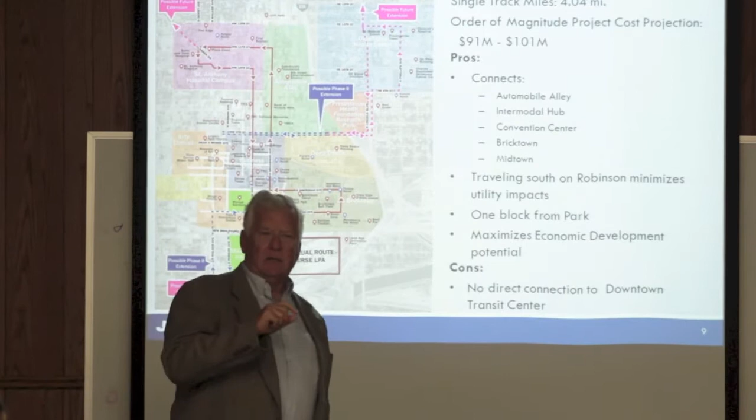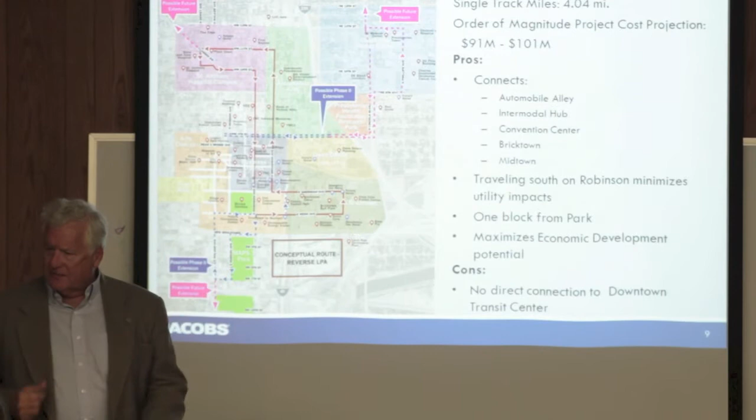We have brought forward to you 4 options that we would judge are professionally viable and the best ones to meet the criteria. And as we said, the purpose of today is to get all the questions on the table, comments, issues, and other things, sift through that, and then after this meeting come to agreement in the subsequent months as to the alignment that you intend to select.

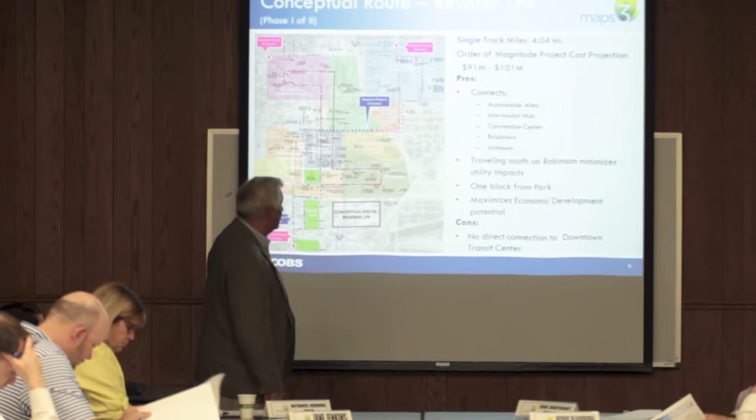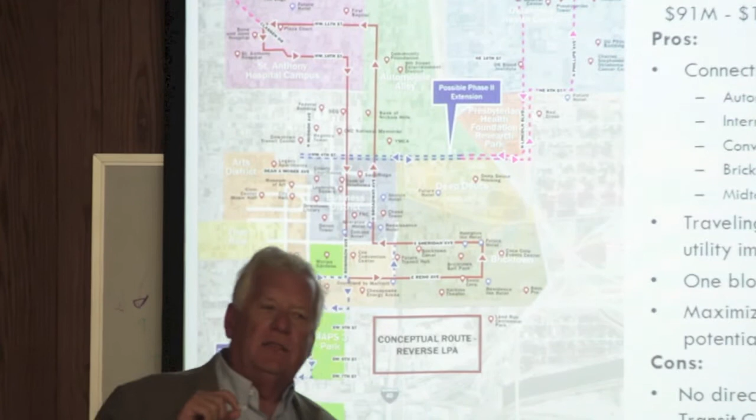The red line is the phase 1 line. And this one, we've labeled it - we call it reverse LPA, and I'll explain that to you. The blue dashed lines - there are 2 different blue dashed lines - those are candidates for a phase 2 expansion, and each one of them is approximately equal to the amount of money that's in the phase 2 budget, $24 million.

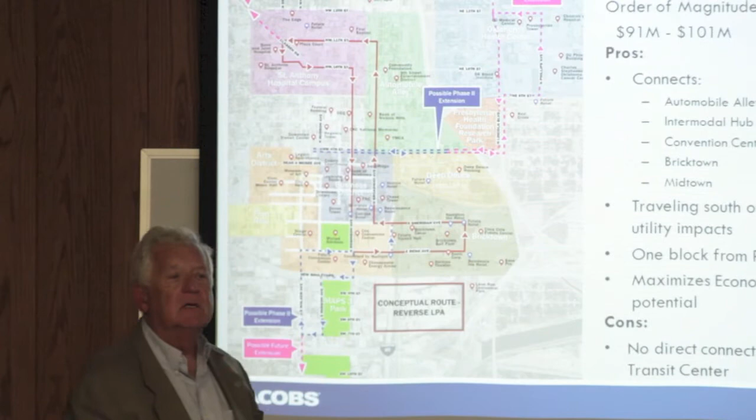It does show that you can build a phase 2 line in segments, build a key segment to begin with, and the red or almost pink dashed lines are further extensions that could be made. It's more to test whether in building the first one you've put it in the right place to where it could serve further interests, if you decide as a community that that's what you want to do in expanding it.

So we had, for instance, the core to shore line, and then this extension down connecting on Walker to the further south to the river in Capitol Hill, the OHC line, and then even a possible future extension on Placid. So all of those fit with what's been prepared for you to evaluate.

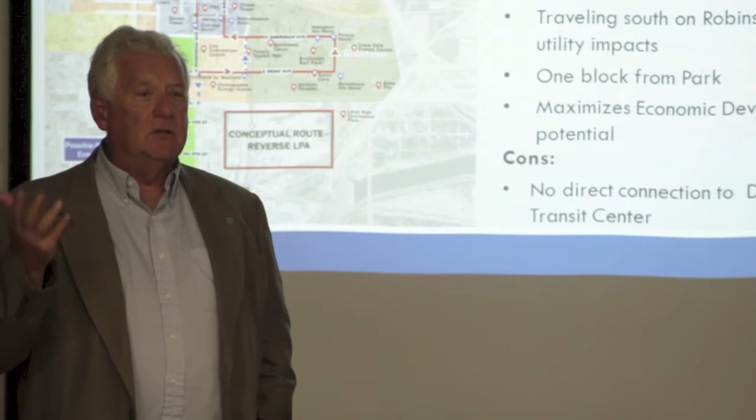So the first option, the phase 1 option featured here, is called the reverse LPA, which is essentially to reverse the direction from how you had the LPA operating. The primary mover behind that were the duct banks in Robinson and the utility impacts. Now that's a trade-off. That gave, in our judgment, a nod to the reverse LPA over the regular LPA.

So the LPA was a well-done piece of work, matching the fundamental component of Midtown to Bricktown. It's quite legible, very straightforward, but we reversed the direction. And it has issues both in terms of how that couplet works, and issues in terms of the stop down near the hub. The major negative we found in looking at reaching all the destinations was that the existing transit hub is not served with this option.

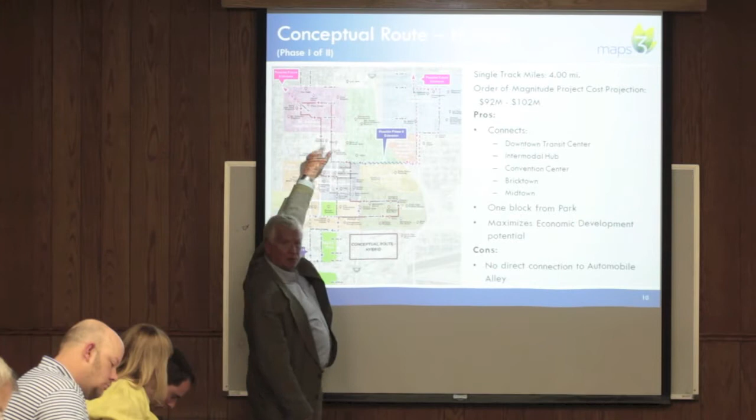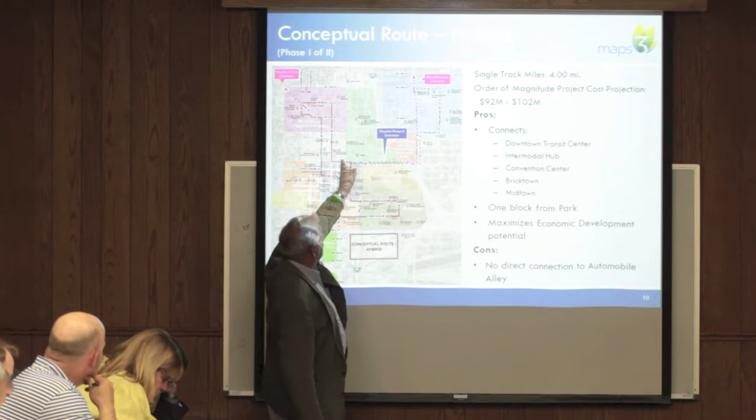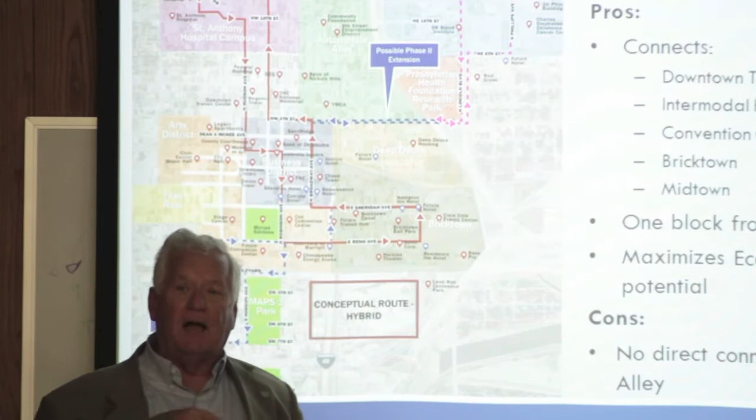We did a two-way Hudson option, and we looked at that one, and then by turning it at 4th Street, here you tie in with a long-term plan, and then come down the regular route the same as the reverse LPA. So there's a very obvious missing piece of this one, which is it doesn't serve Automobile Alley, a very significant aspect of it.

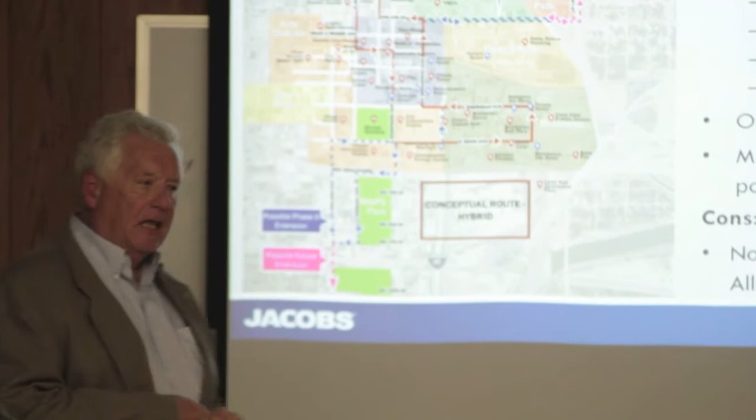What we're sharing with you is the same thing you've shared for quite a long time in your work: it's very hard to establish an alignment that takes care of all of the destinations that you have in mind. So that's the hybrid, and it's, again, viable, legible, straightforward, making the Midtown to Bricktown connection. It matches all of the possible expansions that you could make in the system. So it was also rated as reasonable and viable.

Next one, the Zeta option. We worked at coming up with a name for it. It's Z, but Zeta sounds like a good option, and that's the name we provided to it.

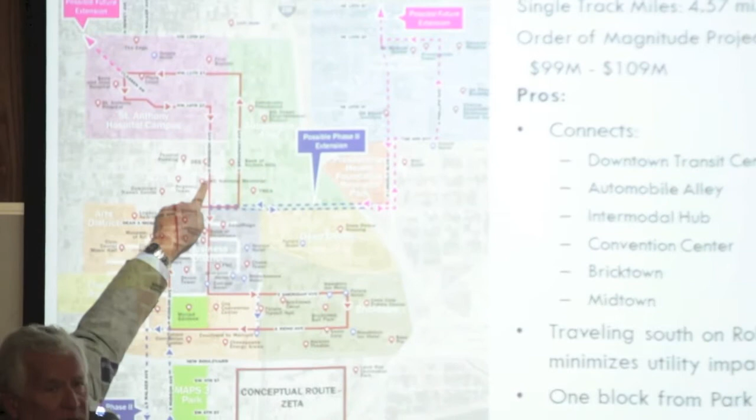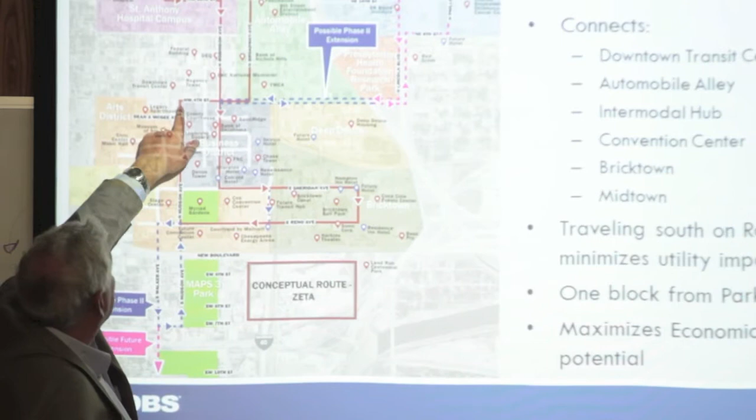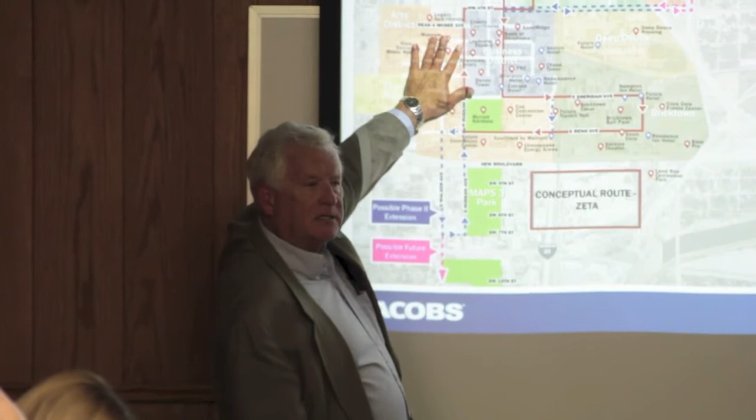On the north side, it serves the Broadway corridor and Robinson, and then turns at 4th Street. It comes down, straight down as the reverse LPA on Robinson, into Bricktown, around Bricktown, and then up Hudson to 4th Street, and then back to Broadway. It takes in the transit center, provides your Bricktown connection, your Midtown connection, and makes a stronger gesture toward the municipal side of the downtown business center, the arts district, and close to Film Row.

So that Zeta option has been judged as feasible, and as you can see, it also fits into the system expansion plans.

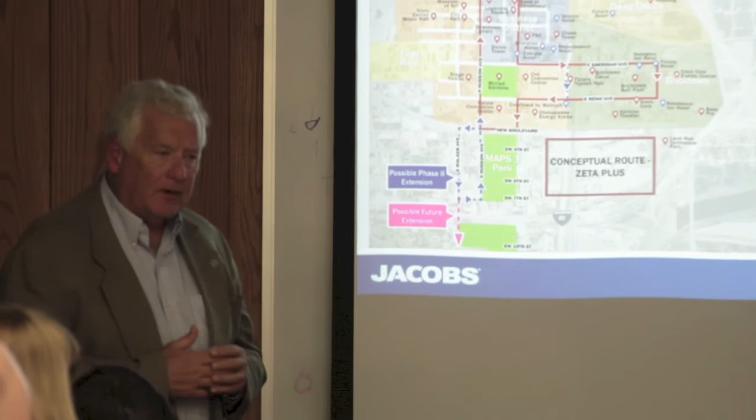The final option we call Zeta Plus, because the drawback of the Zeta was recognizing that there was not direct access to the park and service on the boulevard. Certainly the direct access for a streetcar to the park is judged as very important. There's definitely interest in seeing Phase 2 address that.

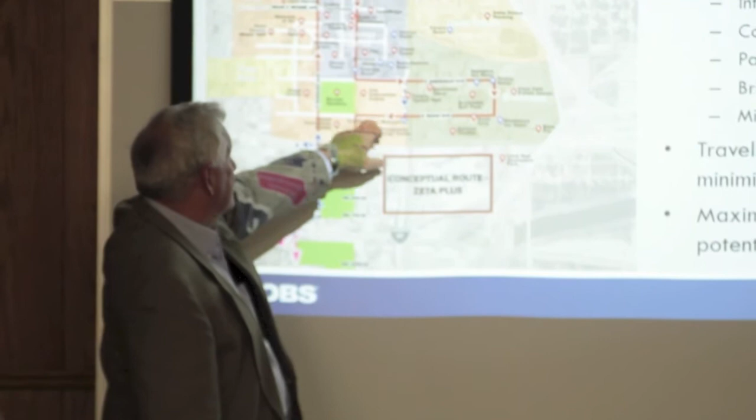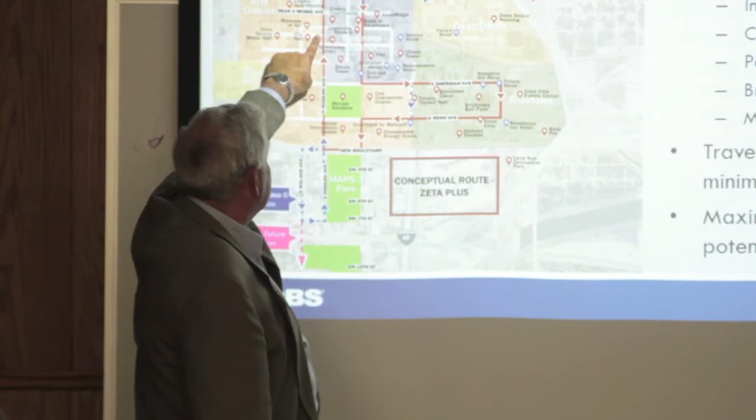This one proposes coming on Reno, turning down to the boulevard and then back up Hudson, down on Robinson, making this jog around in this direction and then heading north. That's the primary difference between the Zeta option and the Zeta Plus option.

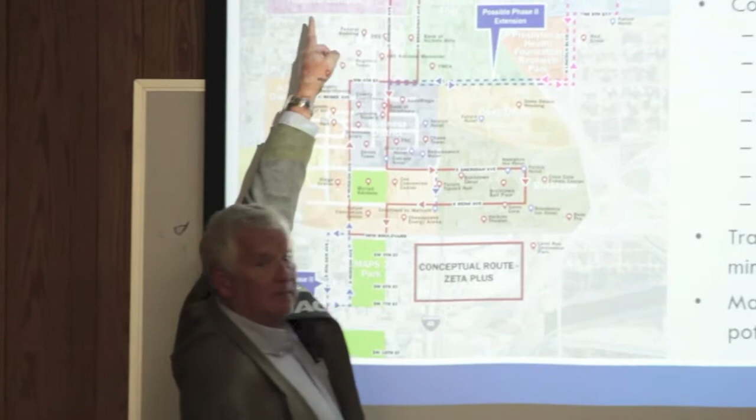We will discuss more thoroughly the issue about Midtown. There are a number of options available to you about how to most effectively serve Midtown and its potential, and they have cost ramifications and access ramifications, and we can show you. This is the one that we pose as the least expensive option.

Because you notice the cost estimate for the Zeta Plus option is $97 to $107 million, and the budget is $94 million. So we as a team are determined to meet the Phase 1 budget and provide you a project for Phase 1 that makes it possible to allow Phase 2 to proceed on the schedule you have. That means trying to make sure you can build the first project for the $94 million budget you have. So we will work on that, and that's a challenge to us to help you reduce the scope and the cost in order to deliver the project within that budget.

But the North Midtown, what we call the tail track, and I'll describe that in a minute when we get to that slide, is a way to save money to enable the additional track miles needed in order to cover the access to the park and service on the boulevard.

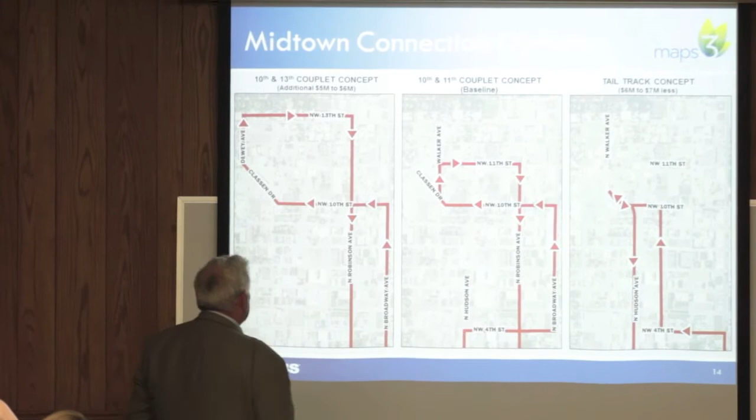So now Midtown - as we did the economic analysis and found the catalyst sites in the St. Anthony's area, and the circle became very important, we are recommending that you definitely have the streetcar on 10th Street. It has the best economic development potential. So we're recommending moving from 11th to 10th from the LPA that was adopted.

And what this does is open up questions for you as to which type of service you want to provide in the area. This would be closer to what was in the LPA, only on 11th, but continuing on 10th up to Dewey and around 13th. That's the most expensive option.

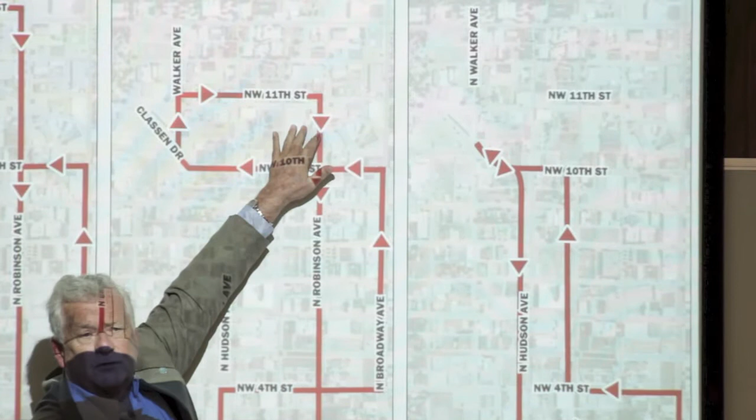This one, by going on 10th, allows you to utilize 11th, and by reversing the direction, you avoid the hook in 11th, where it's harder to have a streetcar move through - not impossible - and then come down Robinson. That's the little loop, which we use as our baseline for costs.

And then you have a choice of going to what we call a tail track, or a dead end, where the tracks merge and the train comes back the other direction. That's quite often utilized and it's really not a problem in operations because you have to have recovery time for your vehicle anyway, so a tail track works quite effectively. The biggest problem is that it needs to be out of traffic, so in this location that will take some design creativity, but we have one of the most creative designers I know - Mark has quite a bit of experience with this and actually came up with this idea.

And this option of the tail track could fit with any of the options that have been offered to you. This shows it on the hybrid, but if you simply double track 10th over to the other ones, you can hook 10th Street into any one of the options and it will work. That's the least expensive option.

So it's a whole question of judgment: have you accomplished enough to spur the development being planned in St. Anthony's with the tail track, or does some type of loop seem more important in order to encourage that development? It ought to be driven by what you believe is the best investment you can make for future development in the city.

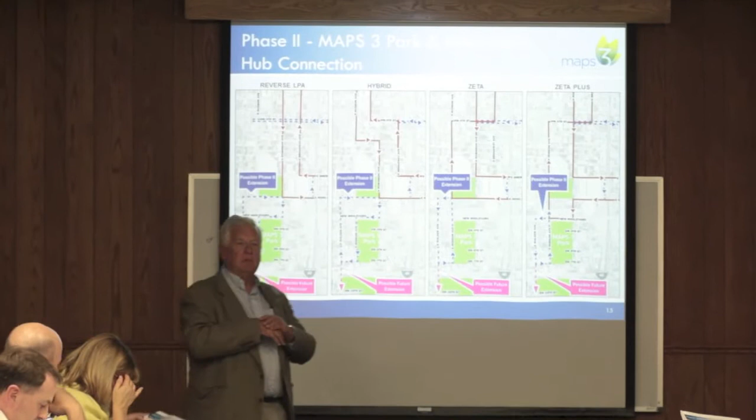The last item is to discuss the Phase 2 options and give you a little bit of the thought process we went through looking at Phase 2, making sure that once you put the tracks down in Phase 1, we haven't overlooked something about how you actually create a Phase 2 and an extension. Two options were considered, based on reaffirmation of your original plan to have the first line connect Midtown to Bricktown, and the second line for the Oklahoma Health Center to the park and Core to Shore. This is the same idea of beginning to look at Phase 2 as starting to accomplish that - these are the blue striped lines that we talked about.

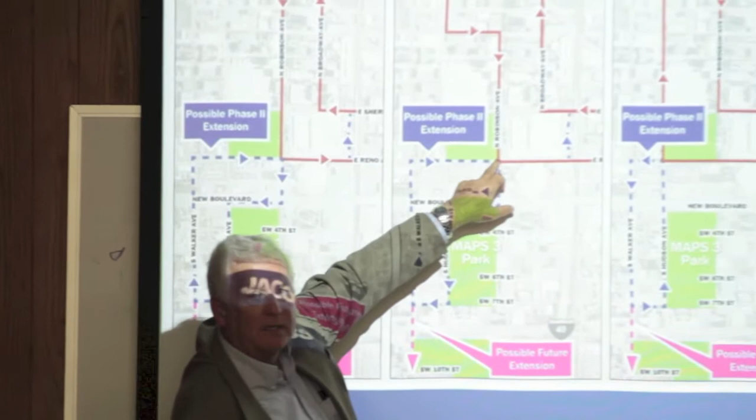So the options for Core to Shore are to connect with the existing line, the Phase 1 line here, continuing Robinson south to the boulevard, across and down in front of the park, all the way turning around back on Walker.

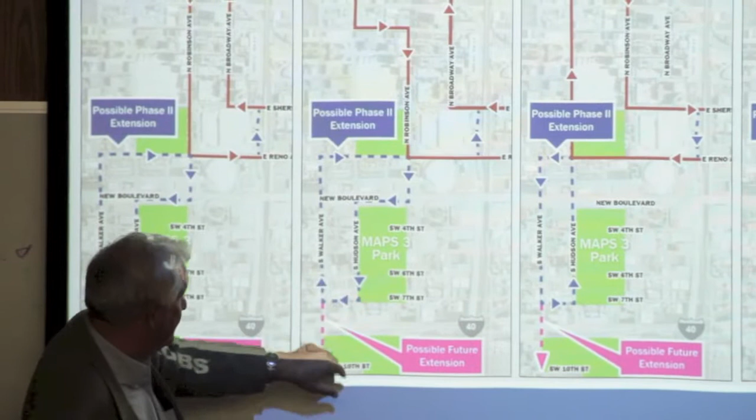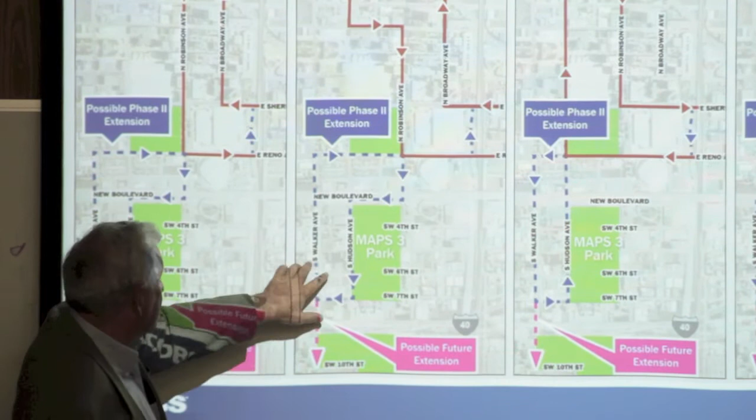The reason for being on Walker and doing this couplet is because the access south would be this direction. So this would work quite effectively with Walker being tracks in both lanes, in both directions, and a single couplet track here with Walker, and then coming back and connecting here, and then turning at Gaylord, and then continuing on up to eventually taking the 4th Street extension. So that's the core to shore.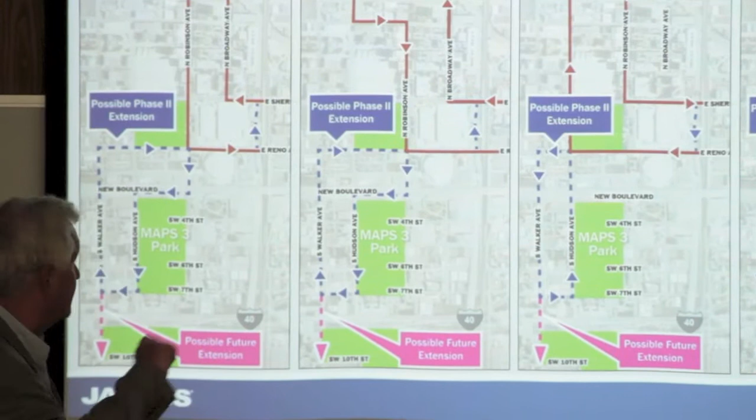They're all similar, little modification here, which can be, doesn't have to be. There's really a choice between this, but it could show you could also come all the way to Walker and then back up the park and then straight up Hudson. So this kept it straight from here all the way to the top. So those are just options that you could consider in phase 2.

The second option then is the extension of 4th Street, starting toward the Oklahoma Health Center, and that's certainly an option too. That would be tracks in both directions on 4th Street, then making the connection. The challenge with that one is there isn't enough money to get to the Oklahoma Health Center, so you could build the section through Deep Deuce with the 24 million.

Let me ask you, on the phase 2 expansion, are the blue lines either or? Either or. Okay.

Well, what we've drawn is one segment. This segment here, combined with this, ends up being an operable segment for you, and would cost probably $24 million. This would also be an operable segment for you and would cost $24 million. So if you were limited to $24 million, it's either or.

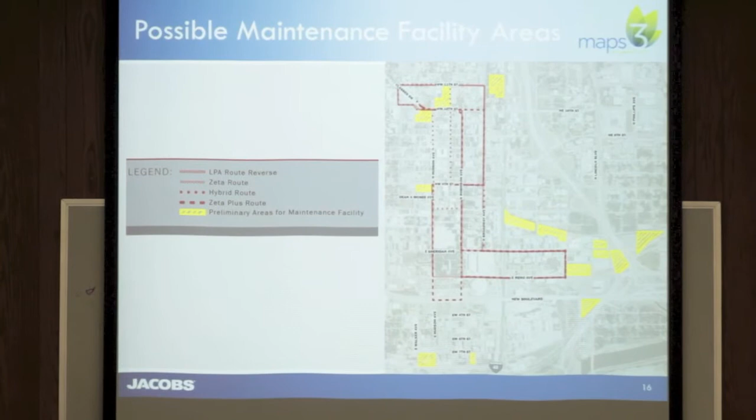We're not really ready to discuss this today regarding the maintenance facility, but many of you have seen this graphic before where we've highlighted some preliminary areas for the maintenance facility. We really just wanted to show you how these conceptual routes relate to these preliminary areas. We're still in the initial screening phase, so we'll be narrowing these sites down in the future, but we just want to show you how these sites relate to the routes on the table.

Now, one thing we want to do is give you all some homework. We have a few questions that we'd like to propose to you. We could discuss this today.

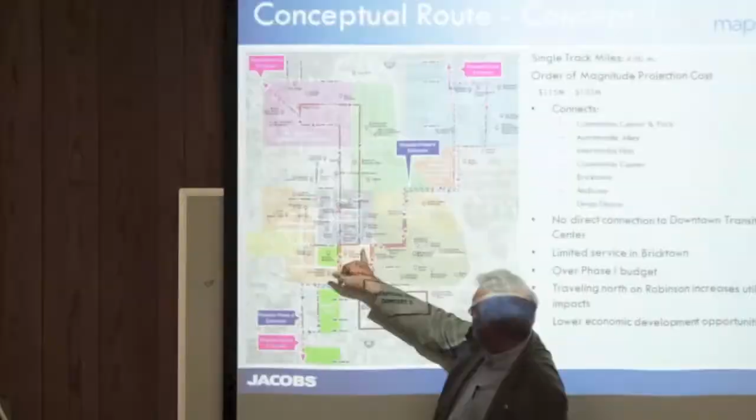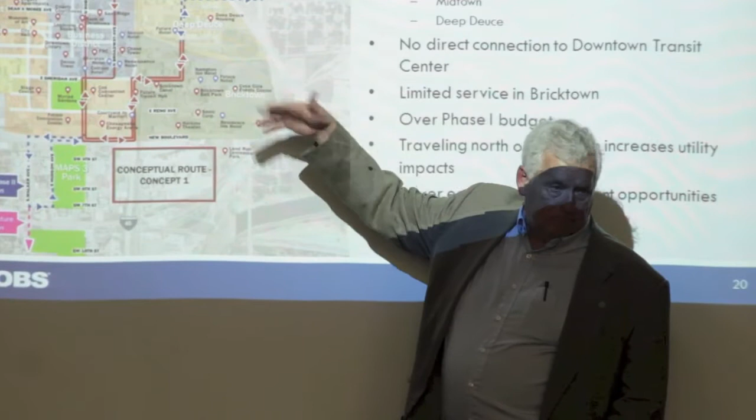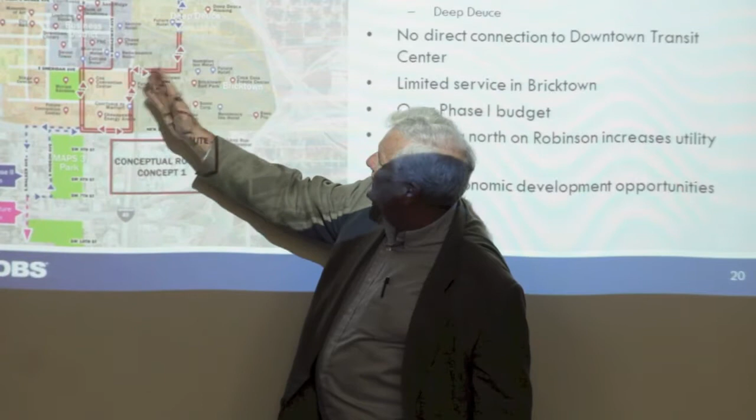Here's your concept one. We evaluated concept one, and essentially it's the same as the LPA North, and then it makes these changes here to encounter Deep Deuce, which is legitimate. It's a developing area, has all the right kind of people as riders, makes a lot of sense. Our evaluation, though, first of all, is there's a lot of economic additional development opportunities here, even proposed projects that would now be distanced from the line. So on the economic development side, while you had some makeup here in Deep Deuce because you've got additional parcels for development, you lose that economic development potential elsewhere.

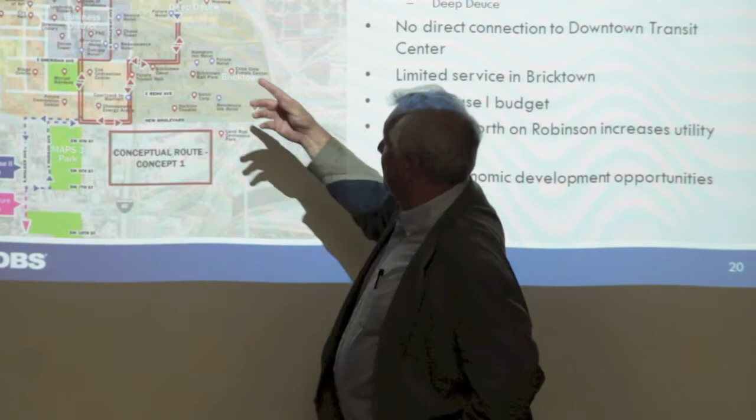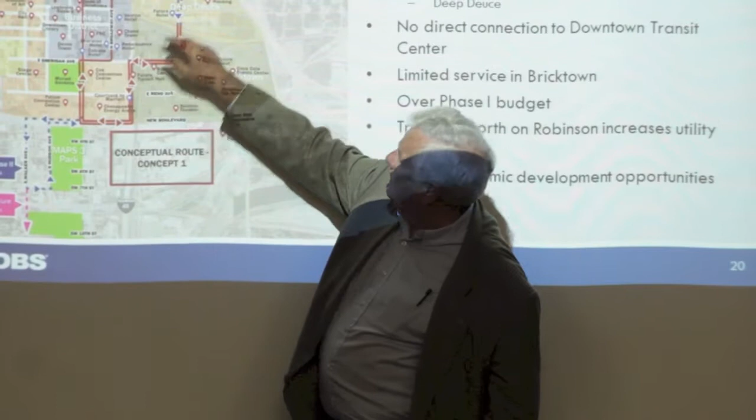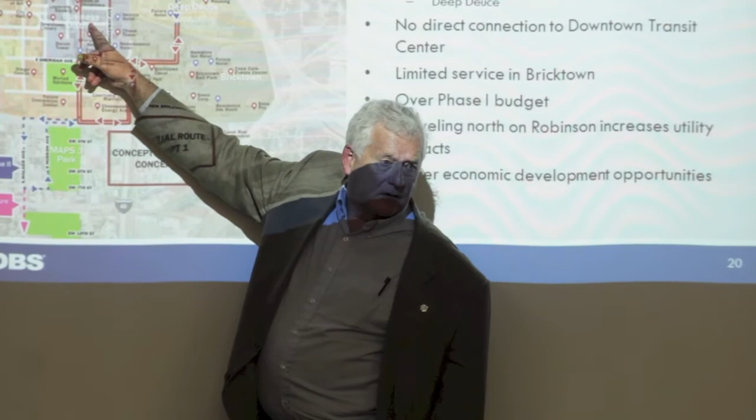But if you look at it from a Deep Deuce customer point of view, you have to appreciate that Deep Deuce is stuck in the place of being two blocks from everything, two blocks from Bricktown and two blocks from downtown. So when a Deep Deuce customer thinks about getting on the streetcar line, they have to travel all the way down here to get to Midtown. I would predict that 90% of them would make the choice of walking over here and getting on the streetcar instead. So the southern half of the demand analysis you have for the simple first line is confused and probably diminished.

Because the Deep Deuce customer has good access to the convention center, but following that, they don't have good access. So that configuration, the 4th Street option really represents a good opportunity for Deep Deuce and its development, and that's its orientation, if phase 2.

If that part of phase 2 is chosen over the phase 2 that would go down by the park, you see what happens: this line starts to disrupt your ability to build the system. Because if you just extend from here, the OHC customer has a difficult time getting downtown. So the cross that you had originally adopted, with the two lines, was really the right way to approach your long-term transit needs.

Transit tends to be linear, and serving that center point is valuable. Creating those two crosses was a great contribution you made in recognizing the two phases and trying to go to the two lines. Okay, I'm good with that.

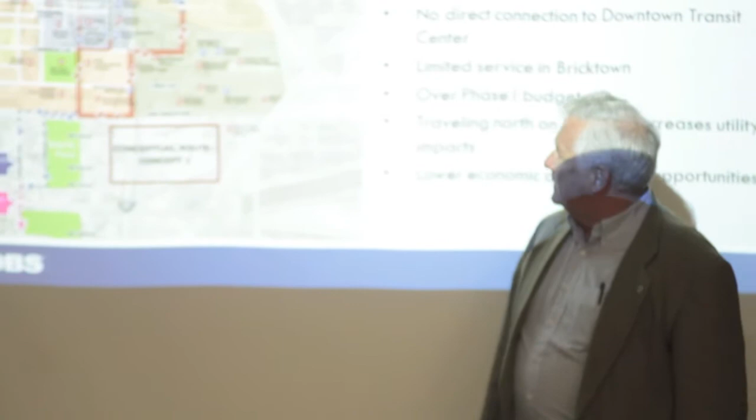Then the Boathouse district is right there, in the proposed Whitewater part, a little bit further to the east. We did some work on that. It would be easy to provide an extension from the Bricktown line down this direction to serve it, as it emerges and as support for the streetcar concept grows in the community and your transit ridership grows. Then this kind of connection can be added, and we just didn't add it in the system plan.

It's kind of like the film row question, which is very appropriate. An emerging district has a lot going for it, and we'll start developing, and certainly the transit connection is there.

And I guess I'd urge you, this may sound like heresy from me as the streetcar character, to integrate better. The study that COTPA has done with the transit system redesign is very valuable to us, because tying in your bus system effectively with your rail system is going to be very important, and there are a lot of opportunities to create other corridors through your bus system, reinforcing the whole development pattern emerging downtown, where you've made a great investment.

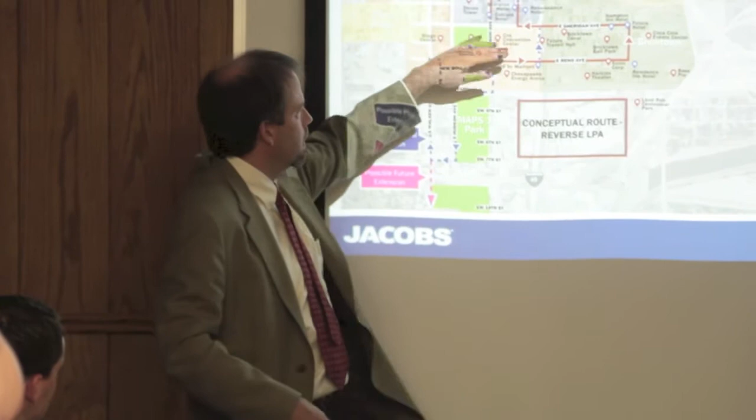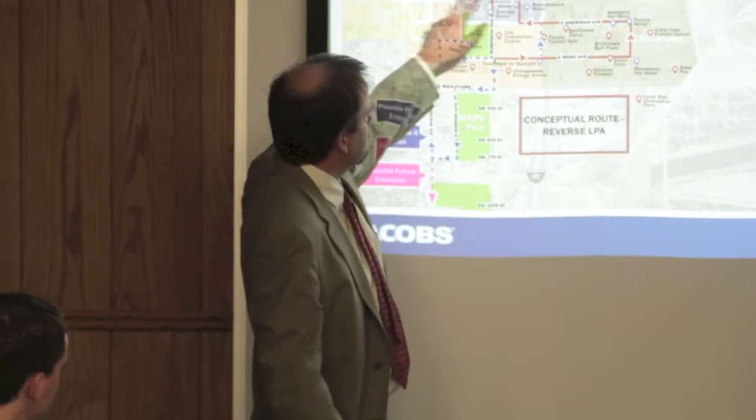So we might not want to center one on... second, I guess, because it wouldn't be intuitive to get to that other one on the other side. And it would interrupt the access from this to get all the way across. So it's choosing that connecting corridor, the connecting street, or how people walk to the stop, to make sure that's a clear and intuitive way to get to the stops.

Wayfinding can be part of the solution, to inform people where to catch the streetcar. And I'm not sure of other lighting as well, for nighttime if there's inadequate lighting.

So you have seen it done this way? Sure. In Portland, primarily because of the traffic network being all one-way streets, we put the streetcars on a couplet orientation. It's been very successful.

Still be traveling in the direction of traffic. Right, yeah, we understand that. In Seattle, their first line is half and half — the southern half of the project is on two tracks on one street, and then it splits into a couplet.

And I'll give you the other one: to make sure that you have the visibility. To quote Kevin Lynch, if you've ever read The Image of the City by Kevin Lynch, he talks about how distance is not nearly as important as being able to see where you're getting — seeing your destination. So being able to see the connection between one stop and the other is more important than which side of the street it's on. As a pedestrian, having confidence that if you walk that direction, you'll be successful.

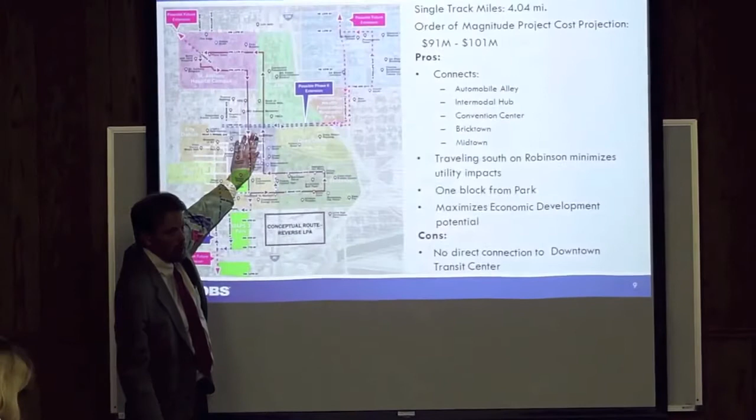So again, the question: why did double tracking Broadway not score well? It's been talked about over and over again. As I mentioned, it's primarily because you're missing half of the economic development, you're not penetrating the core of the CBD as well, and it's farthest away from the transit center.

I don't know how much weight is being given to the transit center, but there's certainly talk underway of revamping our bus system and going to a grid. Were that to happen, the bus transit center might become far less important. I hate to see too much weight given to that when the bus system is in a state of flux. We're looking at a system that hopefully we'll be using for 30 years — will there be a bus transfer center in 30 years? May solve that problem anyway.

Exactly. It's actually in this category here, which was not weighted — the connection to the transit center. Also this category in terms of ridership, because connecting to that transit center will give you a bump in riders, and neither of these were weighted. At least for now, it will give you a bump. How do you get a bump in riders if you're in a couplet, and only one part of that couplet is serving the transit center?

Well, because it connects in one direction. That was affected in our scoring of 1 through 5. If one line directly connects, we gave a score. If 2 lines, inbound and outbound, both directly connect, that got a higher score. If one is 1 block away and one directly connects, that gives a median score, and if neither connect, then a lower score.

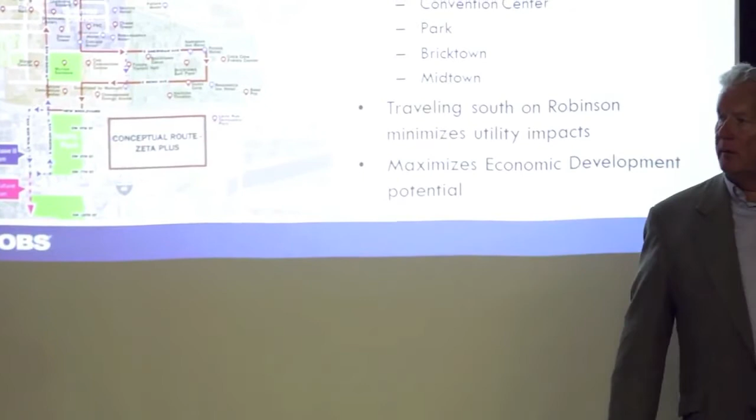So your Zeta Plus plan shows going across 10th with the railroad? Zeta Plus crosses, it actually goes under the BNSF on 4th Street. Tacoma goes across a little spur line, a rail line, and Tampa does too — it's quite painful. But we actually looked at going across the rail line, and it was a mainline railroad, Union Pacific. I stand corrected, thank you. And we built a bridge over the top of it, which was a significant financial commitment.

Can you talk to why we always seem to have one track going in one direction? Why can't we just use one track for both directions? One track for both directions? Yeah, you'd have to take it out of traffic.

So you'd lose the whole lane. If you were to change your traffic plan so that lane is exclusive, then you can run one track and run both directions on the track. But you could get further, surely.

There are different debates about how much it actually costs. We put in a 1 mile single track section in a reserved right of way. It was a temporary arrangement. We did it at the south end of town. The contractor came to us and wanted to build 2 tracks because he thought he could do it for the same amount of money as it cost to do the signal interconnect between the 2 ends.

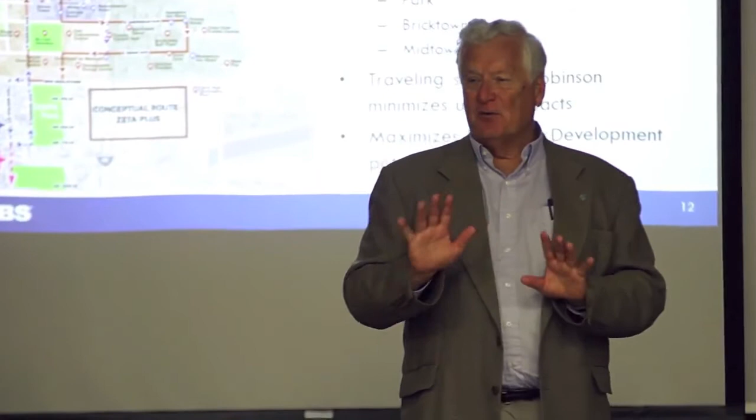We told him no because it's a temporary track, and we didn't want anybody to think it was permanent. So we built it. So the single track idea, in my opinion, should never be done for cost saving purposes, because I don't believe you're going to save money. Why is that? Because you have to tie the signals together.

You have to have a signal that says to that train, they cannot go because another train is in the track. You can only go one direction or the other, and that's the Tampa model. They go from stop to stop, and then they split the tracks and run single track. Now, they don't do the signal intertie because they have the visual aspect. But typically, when you're running a lot of trains with frequencies of 10 minutes and 15 minutes, you should have signal systems that tell you you cannot enter that track because there's another train coming in the track on the other side, so somebody has priority.

The cost of doing that signal intertie, particularly if it's a longer distance, comes close to the cost of building a second track. So you do it for other reasons. Kansas City has considered doing it for the last 3/4 of a mile because it's a temporary solution for them as they work toward the expansion.

Along with that, you have the cost of safeguarding all the driveway crossings and cross-street crossings. So you'll have to intertie them all, and there's also just public perception of what's an intuitive way to know where the train may be coming.

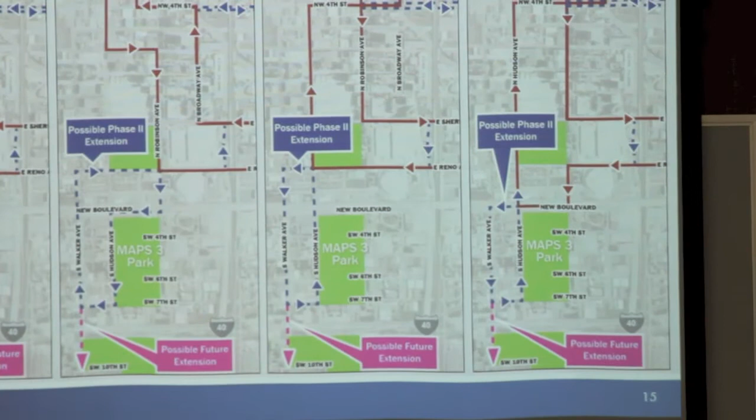Not yet. The turnaround is desired to enable better control over your operation, no question about it. So the question was whether we'd have the ability to turn cars around, in the case of the Zeta maybe you'd have a connection from eastbound 4th to southbound Robinson, and there are varying reasons why you have those connections. In this case, we'd be in the right lane connecting to a right lane, so right-of-way may be a concern. But that's the sort of detail we'll look at as we get into the detailed engineering.

Okay, well, any other questions from the committee on this? Mark, Lee, and Rick, before we move on? Well, thank you, gentlemen, that was very thorough. Thank you.

So we kind of bled into the next topic of general discussion for the streetcar, but is there something else, kind of off the topic of this presentation but still on topics we need to discuss today, that you want to bring up?

Well, one thing that bothers me about this question that's going to be posed to the general public and stakeholders—how important is it to serve the existing downtown transit center—I think that's unfair without the context of the Nelson Nygaard study. From my conversation with the consultants and the presentation done at council and at these public meetings, they were strongly suggesting that simply overlapping major bus routes with whatever the chosen streetcar line is may be a sufficient connection that would warrant not necessarily having to go by the hub. The way the question is worded, or the fact that it exists without any context of the bus system, I think is really unfortunate and unfairly weighs the scoring process.